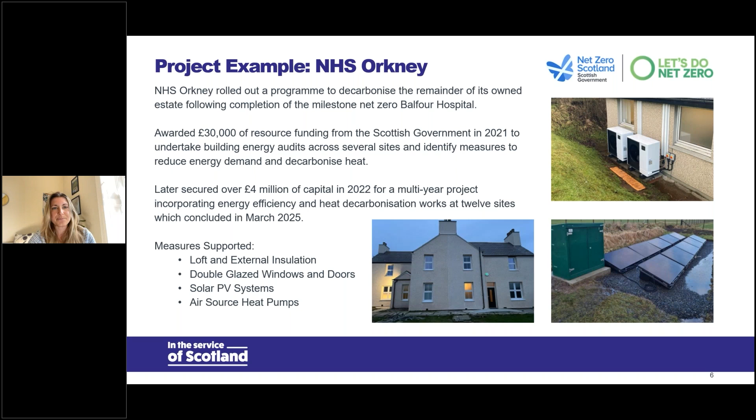The Public Sector Heat Decarbonisation Fund, which is delivered for us by Salix Finance, is the other half of our grant offering. This scheme is for local authorities, universities, and arm's length external organisations, and offers up to 80% capital for a whole building approach to decarbonise heat and improve energy performance.

This has so far supported about 11 projects with £14 million of spend, delivered by Salix, who are an arm's length body of DESNZ. They also deliver all of the UK government's equivalent schemes. That grant fund is open for a little bit longer, closing on Tuesday for our phase 2 of Salix.

I will talk about one of the projects that Salix supported on our behalf last year, which is the Glasgow Life Museum Resource Centre. Sorry, next slide, Emma.

Again, a really exciting project supported by the grant scheme for the Glasgow Museums Resource Centre. It is a storage facility primarily and visitor centre. It houses over 1 million objects from different collections, which I'm led to believe is about 90% of the city's collections stored at the resource centre at any one time.

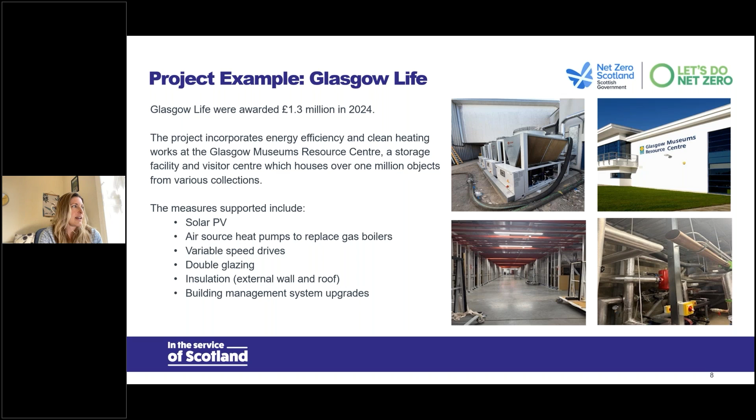Next slide, please. I'll just briefly cover the 2 loan schemes that we run for the public sector - again, these are managed by Salix Finance. The first one is the Energy Efficiency Loan Scheme, which offers up to 75% of the total project value.

The benefit of the loan scheme is, first of all, obviously 0 interest loans, but there is also a bit of flexibility about what you can use loans for in comparison to the grant scheme. For example, LED lighting is eligible under the loans.

Salix offer a kind of holistic support that's wrapped around the loan schemes, with technical support and also peer support and networking opportunities that they help to provide. Both of these loan schemes can be used to fund projects under the non-domestic energy efficiency framework when it's back up and running as well.

We've had a large number of projects supported through the loan schemes, over 1,000 projects, and enormous savings as well from those 1,000 projects, over £200 million over the lifetime. The recycling fund, I think, is a fabulous concept.

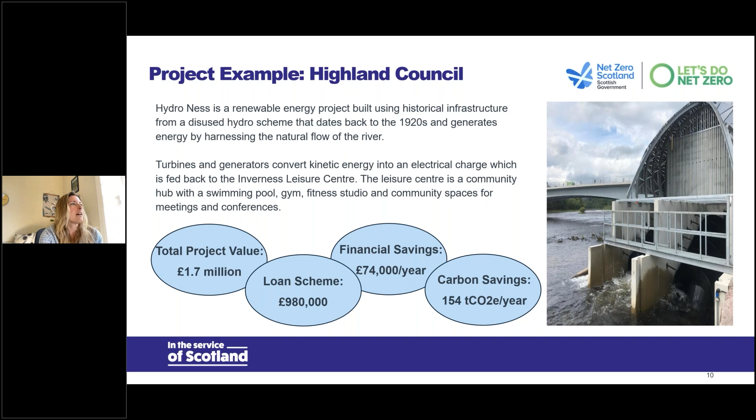I won't pretend to know how the turbines actually work, but it looks really fascinating.

I'm going to talk a little bit about the non-domestic energy efficiency framework and project support unit, mostly to let everybody know these things are coming. So we're currently procuring the project support unit, which will be consultant support, available to all public sector bodies to call off that framework to get consultant support for project planning and identification of measures.

Then, once having used the PSU and hopefully successfully identified a project, and hopefully successfully gained funding, either grant or loan, public bodies can come back onto the NDEE framework, which is actually designed to support the procurement of those projects, and then can ensure that a public body feels confident they're going to get a really good value contract to deliver that work.

As I said, the previous NDEE came to an end last year, so we're just in the process of re-procuring both frameworks, and we'll definitely keep everybody up to date on when they're back in place.

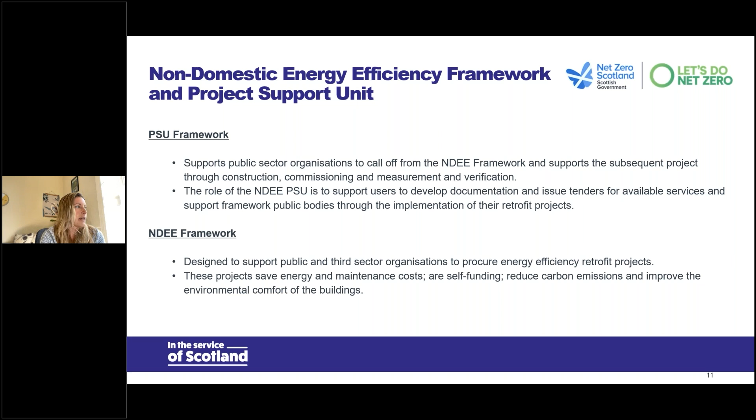I wanted to finish off today just by talking a little bit about another aspect of the work we support more broadly from the public sector unit, which is the Net Zero Public Sector Building Standard. It's something I feel really passionately about, I think it's such a great tool. It's been used really successfully on new build projects across the public sector, and it's something I hope we can apply to more retrofit projects.

The Scottish Futures Trust was the key partner that helped us develop this standard, and they run an excellent series of events on the standard, so I won't even attempt to explain the whole standard, just to encourage those who are interested to reach out to the team at SFT, and again to say I think it's really important that we apply the standard to retrofit projects as well.

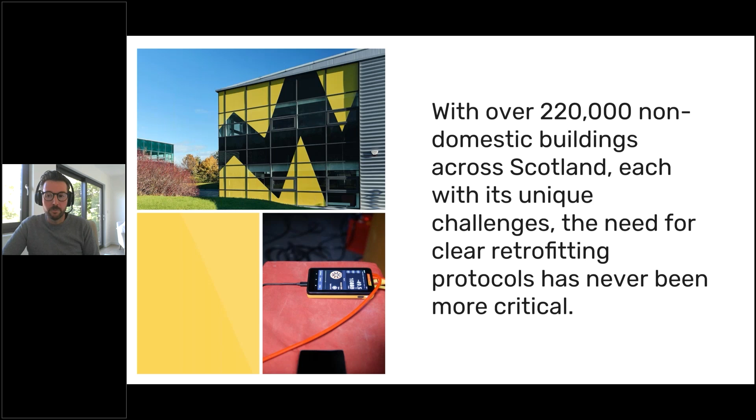So we set out to give Scotland the national centre that it deserves, and we wanted to provide something that acted as a living lab in order to demonstrate different use cases, different approaches.

We don't see this as a building where you would have a carbon copy of this approach, but something more as a menu of options and innovative solutions in retrofit that could be taken away to be delivered on other public buildings or indeed domestic properties as well. The lessons that we learn in retrofit are universal.

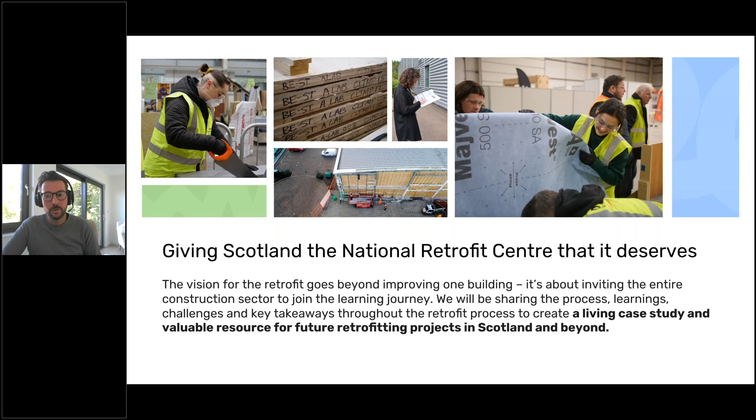We were notified that we were successful in April 2024. However, we were only at stage 1 design at that time, which meant that within the calendar year we had to go to stage 4 design, public procurement, procure the works, get a contractor, get them on site and deliver this project, which made it extremely difficult both in terms of timescales and increased costs experienced throughout the sector.

So there were elements of value engineering which we'll touch on, which I think will be familiar to anyone working in public sector buildings or any retrofit project at all on non-domestic or domestic properties where finance is a real challenge.

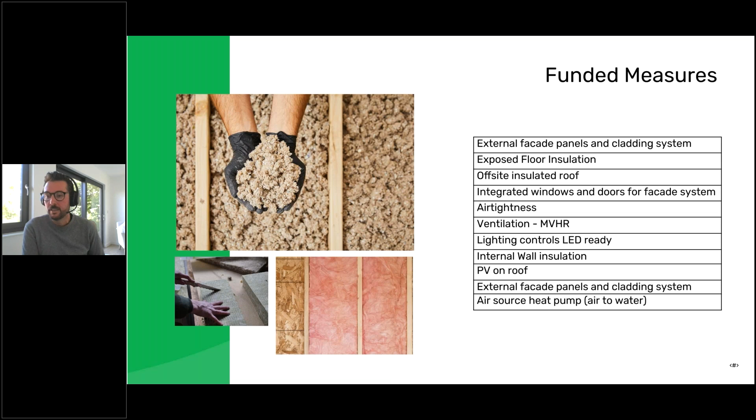So as part of this work, we've split the work into 3 phases. There is a number of reasons for that. We believe that it was more representative of what our stakeholder and wider audience would undertake.

We also had ambitions for the building in terms of future development of that, but that was not set in stone at this point. And we needed to be able to have a deliverable phase 1 project that met the requirements of the funding and also met our requirements as well without creating any abortive spend or work. We didn't want to be installing measures that might later have to be adapted or taken out, but we had to ensure that we were able to deliver something meaningful and reduce the demand on the building.

So the current phase 1 is about heat decarbonisation and fabric envelope measures. Phase 2 is future internal reconfiguration works of the office spaces, as well as potential extension and the completion of that envelope. And the future phases would be phases 3, 4, 5, and 6, which would be the entire building as we see it, eventually ultimately intended to meet the EnerPHit standard, but also the wider net zero campus overall.

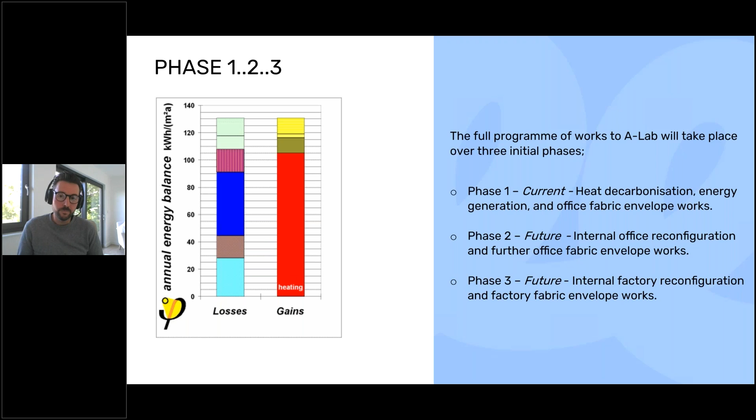At this point, we're essentially taking 3 sides of a 4-sided box down, improving the thermal efficiency on the exterior envelope, increasing the insulation in the roof, and then decarbonising the heat in those heated portions of the front end of the building.

The back end of the building is a non-heated space, factory warehouse space that would come in future phases.

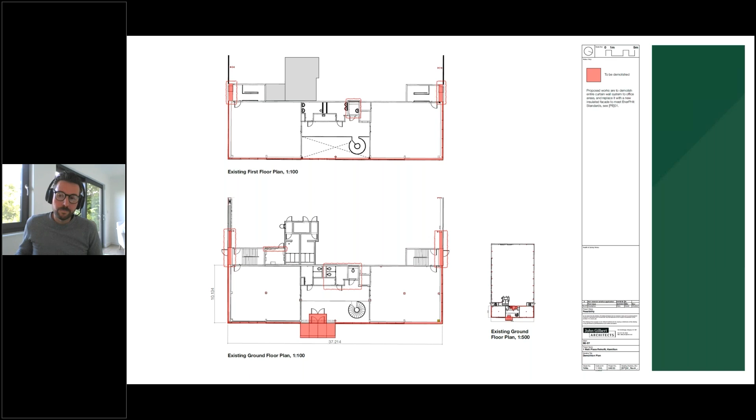Externally, their ambition for this was to reclad the building in a heavily insulated CLT panelised system that we could produce and manufacture off-site as far as is possible, with triple glazed windows and doors, higher energy efficiency, a high degree of air tightness, and using a timber cladding system.

That was our key consideration when going through value engineering options when evaluating the project - to ensure that we met the requirements of the funding and our overall energy ambitions for the project. So anything extra to the thermal envelope was moved into future phases of development work.

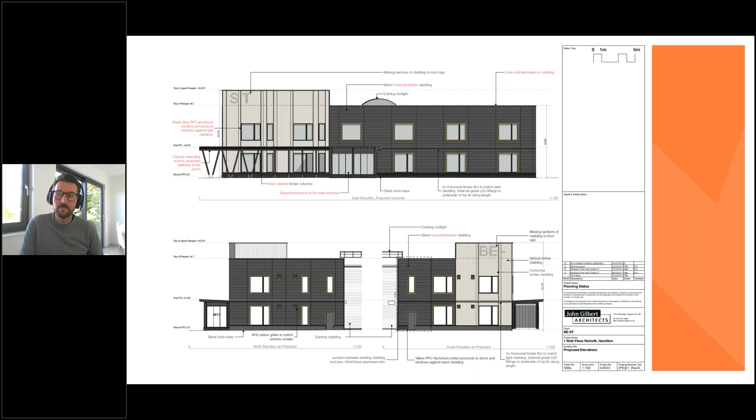So with all retrofit projects, there are challenges and opportunities in decarbonisation. A key factor for us was the timescales to completion, the parameters set by the funding requirements, and also our ability to move quickly and deliver the work.

Opportunity and scoping in terms of the phasing of the development, and also that narrative - how were we able to drive innovation? Being the innovation centre, we wanted to ensure that we were being data driven and also demonstrating as many innovative solutions, product demonstrators as possible, and maximising the showcase for the best of the Scottish construction sector.

How did we manage risk in terms of meeting the funding requirements whilst also not sacrificing our overall ambition, and vice versa? How do we ensure that we capitalise on storytelling, both in terms of our knowledge around embodied carbon and our delivery process, and how do we ensure that we created a platform within the building that delivers more carbon savings beyond those direct savings from the systems installed?

We achieved this by an analysis of the existing building, which included thermography as well as air tightness testing. We developed an overall EnerPHit strategy for the building, which we then phased, so we would not go for certification for that standard at this point, because we would not be completing the full amount of works.

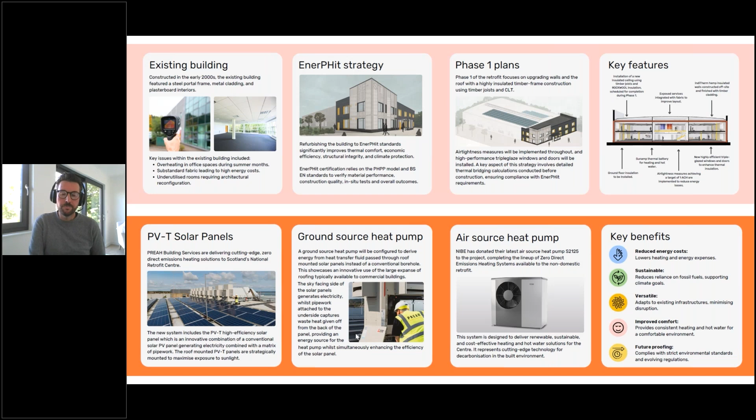Within the building fabric as well, we've managed to partner with companies that we're aware of and who are industry leaders in their field. We've been able to utilise the Kenoteq K-BRIQ, which is a 95% recycled brick, with incredibly low embodied carbon in its production.

We're using Scottish cladding provider Russwood for the external envelope. We've got Ecological Building Systems providing air tightness membranes and tapes to ensure that we can achieve a target air tightness of 1 air change at 50 pascals within the final build.

We've a mixture of Rockwool and IndiTherm, and not highlighted on this slide, we also have Warmcel insulation and blown insulation. What we've done here is utilise the IndiNature IndiTherm hemp and jute batt insulation in the walls, as well as Warmcel blown recycled newspaper insulation within the panelised structure.

The panelised structure has been manufactured within the BE-ST factory using homegrown Scottish timber to create CLT panels by Ecosystems Technologies, and High Six Design have been the architectural technologists who have adapted John Gilbert Architects' system in order to clad the building.

Rockwool insulation is used within the suspended timber ceiling detail because it offers higher performance in terms of fire rating, as well as we wanted to compare and contrast the workability of different materials and show the range of options available.

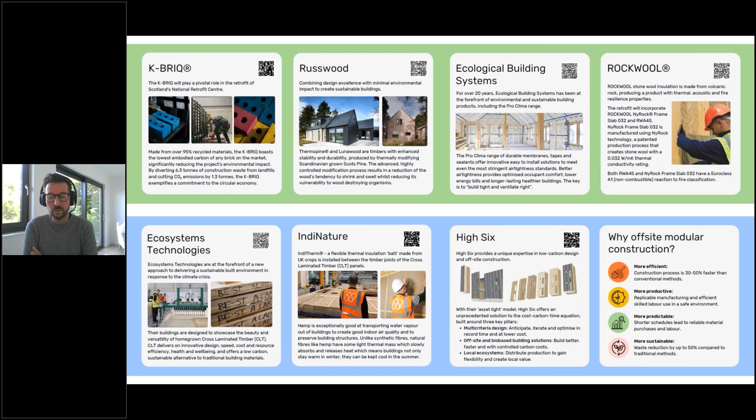This is within our factory at BE-ST, which everyone is welcome to come and visit, as well as coming to visit the project itself, where we were manufacturing the CLT with the design team and members of our own team, to show how easy it is to do, as well as cutting down on the embodied carbon of the response.

Once the CLT has been created, we were able to process it within the factory, strapping it out using timber JJI joists to minimise thermal bridging through the design, and then infilling those panels with the IndiTherm insulation, avoiding any gaps and adhering to Passive House principles. We've also gathered all the evidence for future certification to EnerPHit standard, and had that reviewed by a certifier.

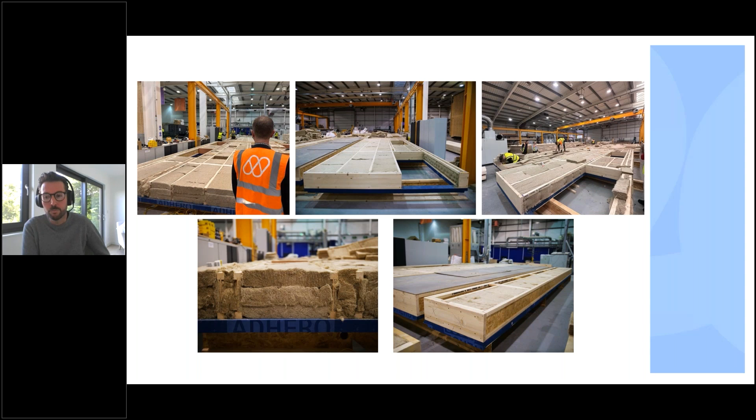The design works on the principle of encapsulating the existing steelwork frame, which is all retained, helping with our embodied carbon calculations, and retaining the existing concrete slab, avoiding any thermal bridging through the structure of the building by enclosing it all within a new system. So we've removed an existing glass and metal curtain walling system and installed this new CLT panelised system.

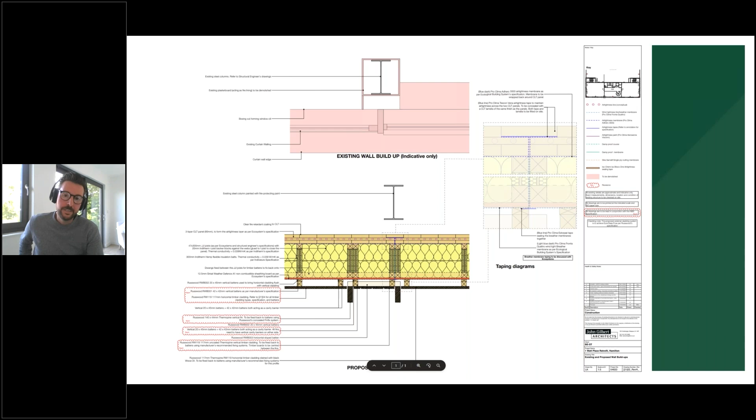These are the panels almost ready to be craned out of position. A majority of the panels come out of the factory 95% complete - fully clad with the windows fitted, tapes and membranes all complete, ready to be craned into position. Other panels were clad in situ, but most panels came out between 85 and 95% complete, which allowed us to meet extremely tight timescales, as well as showing the efficiencies and additional safety we see with modern methods of construction.

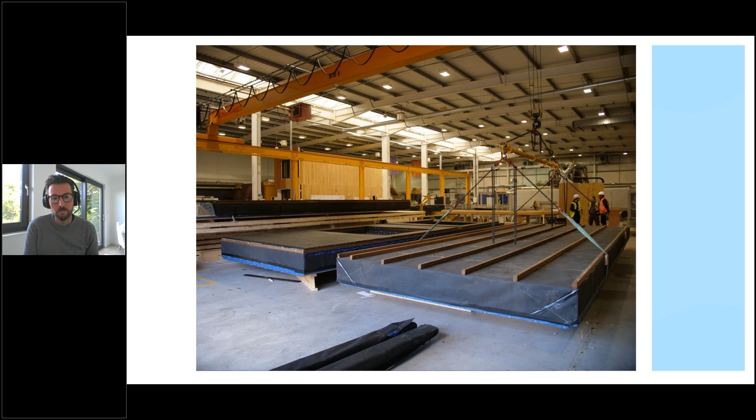We've moved the panels into position here. Emma, if you just want to cycle through these images fairly quickly.

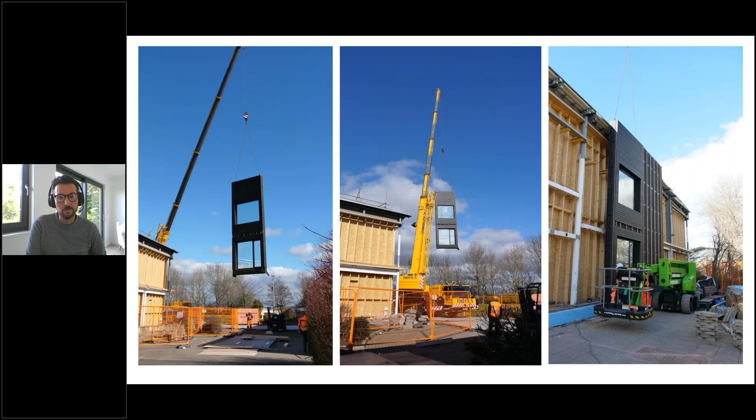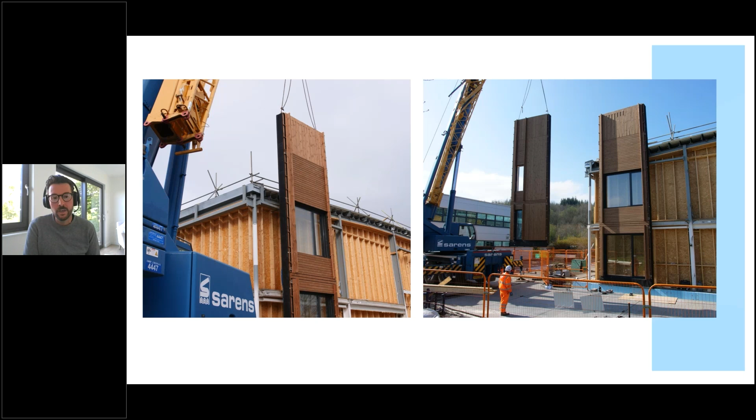So then we crane the panels into position. You can see in these images where we've got the existing structure exposed, having dropped the existing cladding curtain walling system. We've got temporary hoarding separating the external and internal environment, which allows us to work in both areas simultaneously, and also helped us meet that really tight program. The crane lift was done over 5 crane lift days, while manufacturing of other panel phases was completed, and we worked our way around the building installing the cladding system as we went.

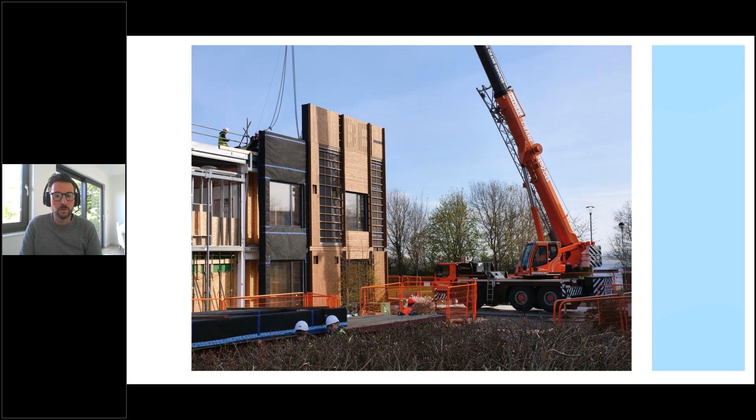We can see here the exposure, the variety between the cladding, how finished one product is over another. Again, the big advantage here too was being able to work simultaneously internally and externally, because there's obviously quite a significant MEP package.

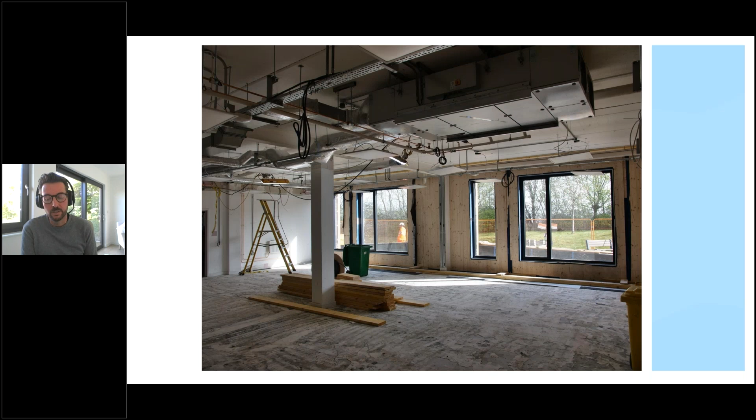One element we did omit in changing our scope within the phase 1 project was ground floor insulation, but we've designed the building to account for future phases of work where ground floor insulation up to 230 mil can be installed. All of the windows and door heads have been designed to accommodate that, allowing us to make savings on additional cost.

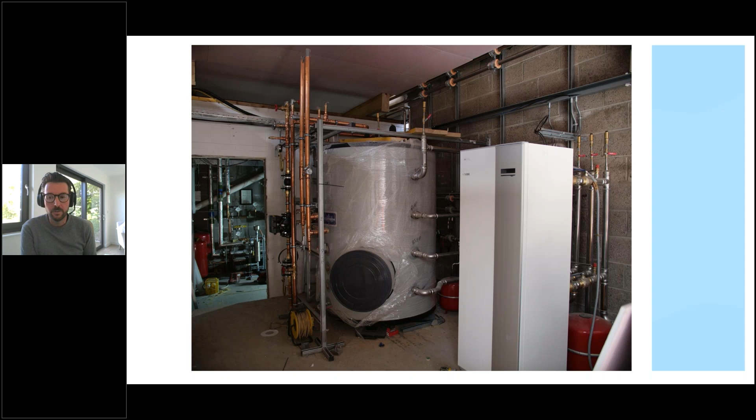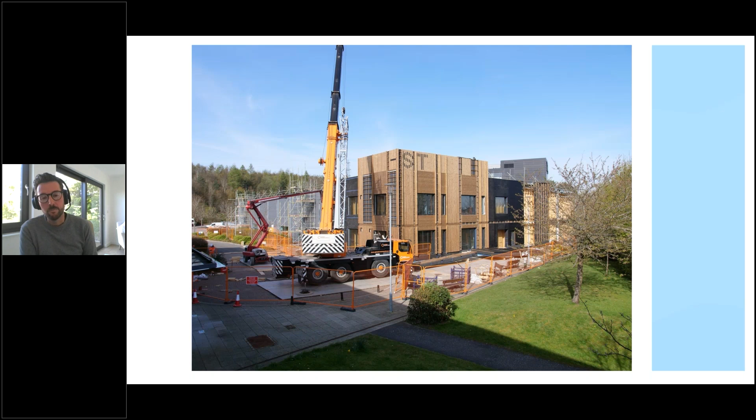We are now fully complete with our external cladding in place, and all internal hoarding has been dropped and all the MEP is installed inside, and we're aiming for completion towards the end of June. The buildings there are available for tours. We're doing a series of behind the build events, and if anyone wants to ask any questions at the end, happy to answer, or you can contact me and drop me an email.

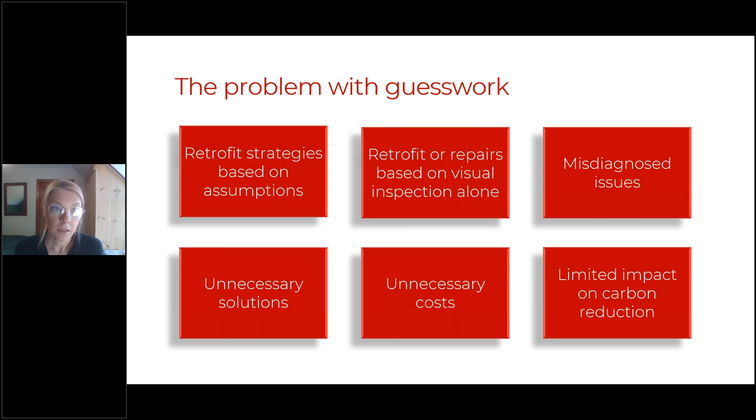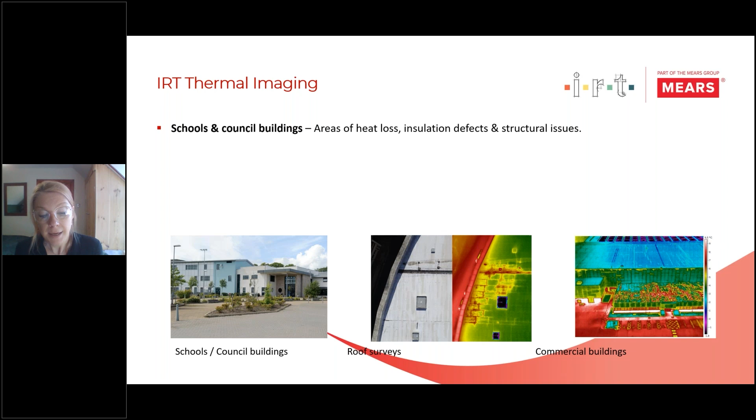Thermal imaging plays a big part in removing that guesswork, and it provides clear visual evidence of where buildings are losing heat. This can be through missing or damaged insulation, thermal bridging, cladding failures, or water ingress, and it can help decision makers just see what the eye cannot.

So we carry out heat loss surveys mainly within the winter months. We start around October time, and we carry them through right to about the end of March. We tend to do a lot more in Scotland, maybe up to the end of April, just because the temperatures are a lot colder. So we do have quite a short time frame in those winter months to really do the thermal imaging side of those projects.

And I've highlighted 4 key areas here where we carry out the majority of our survey work for non-domestic buildings. The top one there is schools and council buildings, and these surveys tend to be to assess the areas of heat loss, any insulation defects, and any structural issues.

We do loads of flat roof surveys, again, mainly on schools, but they're quite reactive surveys. We do find that the buildings have issues currently, and we're out there just to really locate leaks and address wet insulation and just where those areas are. And it offers a nice non-intrusive solution for roofing companies too.

Commercial buildings has mainly been to assess condition of cladding, the condition of render, and the insulation performance on those buildings. The post-retrofit is probably more prominent in the last year to 2 years, and the post-retrofit surveys we carry out has mainly been to validate the workmanship of any measures that have been applied to commercial buildings, and really just to ensure that those solutions are working. So that will be a heat loss survey across elevations and roofs, just to check that those solutions are working.

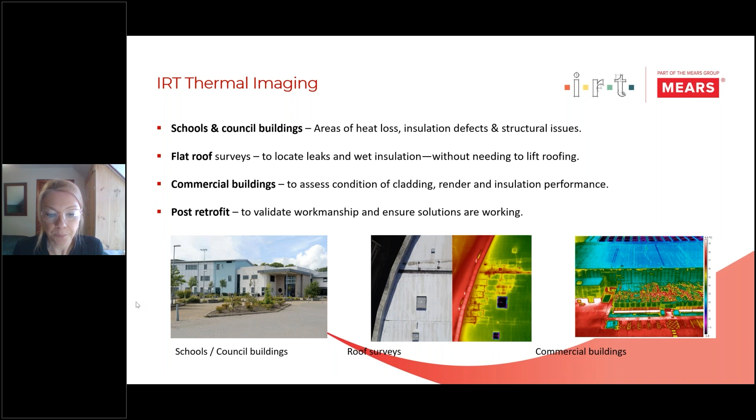So here's an example of a recent survey that we did on a school. It's Portree High School in the Scottish Highlands. We carried out this survey on behalf of Mears Facilities Management. They manage 10 schools on behalf of the council.

Despite years of repairs, the school continued to suffer from water ingress and a fair amount of fabric deterioration. Traditional investigations couldn't really pinpoint the main cause of the fabric issues. The background on this project is many ongoing issues with decay and deterioration of the building fabric, which was leading to render damage, guttering issues, and a lot of water ingress.

There was a lot of investigation work being carried out, reports being carried out, and constant remedial works. Various reports had been commissioned, but all coming back with suspected issues, and a lot of those suspected issues were that the problems were with the guttering and the downpipes. So the Mears team were still quite unclear what the main cause was, and really what action to take here.

So what did we do? We were commissioned to do a full visual and thermal survey of this building, covering all of the elevations and the roof. The visual images are taken during the daytime, and they highlight any staining of the building fabric, cracked render, issues with guttering, and presence of vegetation. The nighttime thermal imaging is to detect areas of heat loss, thermal bridging, as well as any presence of moisture.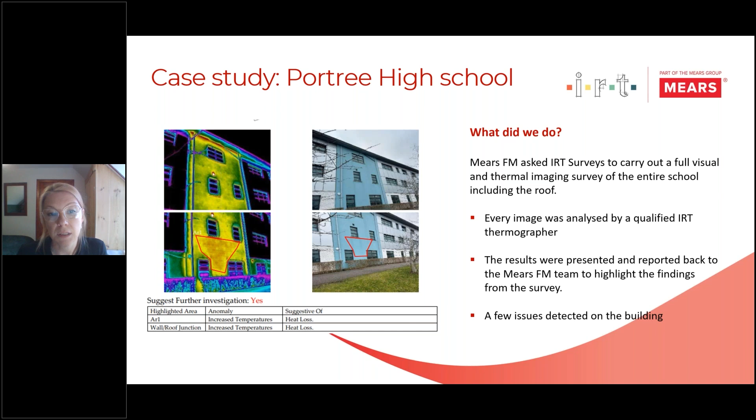The images on the left here are an extract from the report, highlighting areas where they've seen some defects in the building. All of these images are then analysed by the IRT team based in Dundee, and the results are reported back to the client. In this case, it was back to the Mears FM team, highlighting the findings.

We sit down with every client during this process and go through this report in a fair amount of detail. I think in the past we've maybe expected a lot of our clients to interpret the information themselves and understand what their next action might be. Our analysts have really provided a great service in providing a lot more detail around what those images are actually telling the client and what the issues are with that building.

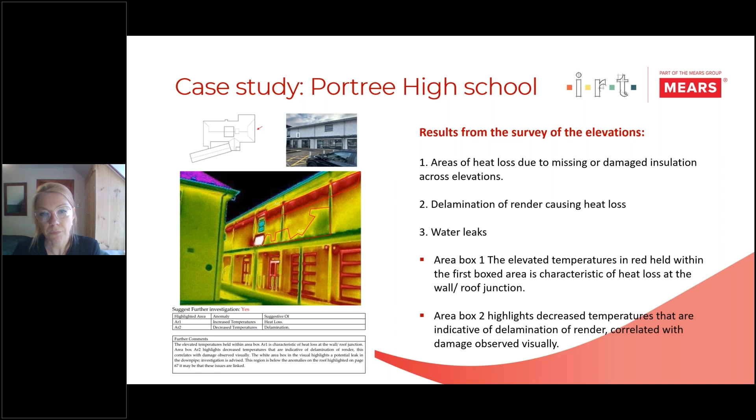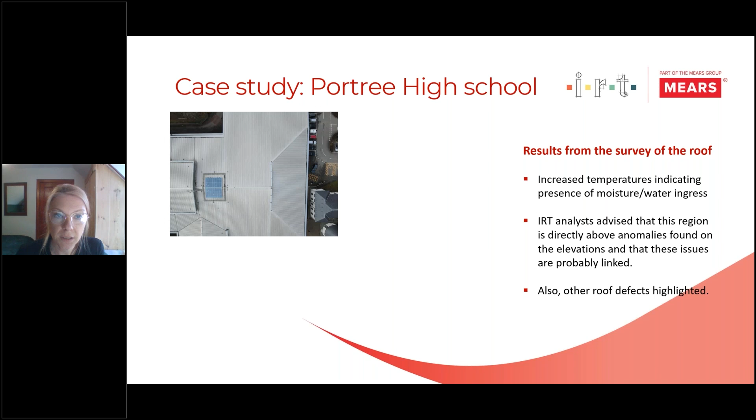The results from the survey revealed multiple critical issues in this building. The main one was heat loss at wall and roof junctions from missing insulation, a fair amount of render delamination, and gutter detailing failures as well, but a lot of hidden water ingress not detectable by visual inspections.

There are some images here on the slides that might be quite interesting, but the extracts show the roof survey that we carried out, and the overall conclusion from our analysts was that most of the issues were caused by the roof, not by the guttering and downpipes, which there were issues with. So these insights did enable Mears to justify that full roof replacement, which was funded based on the thermal evidence here.

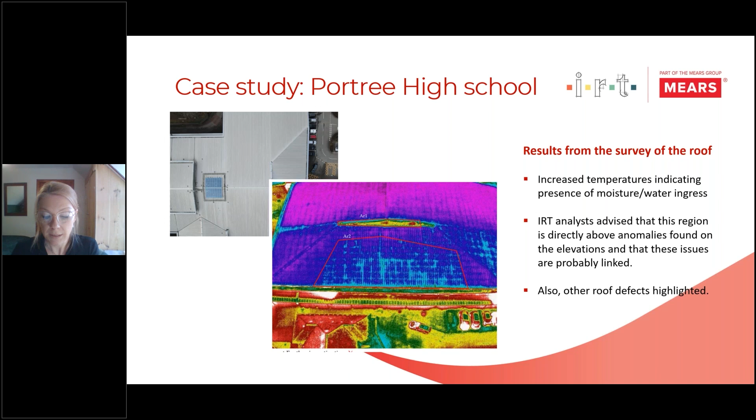So, impact and ROI - what was the outcome? The thermal survey provided enough proof that the building fabric issues in the school were being caused by the roof. With the thermal data, Mears were comparing 18 months of reactive maintenance costs to the cost of a new roof, which results in a more cost-effective, energy-efficient, future-proof solution to increase the life cycle of that school.

By comparing those additional data sets, it just helps with that decision-making process. There's a nice quote there from the life cycle manager at Mears, saying they wouldn't have been in a strong position to get those repairs approved without being certain that was the particular issue with this building.

So, to close off and summarise: thermal surveys don't just detect problems, they help to guide decarbonisation, by understanding the true condition of your building as a starting point. This in turn ensures that any investment you make in retrofit is targeting the real inefficiencies and not assumptions. Thermal imaging is a powerful tool for assessing energy efficiency, but combining it with other data sets can provide a more comprehensive approach.

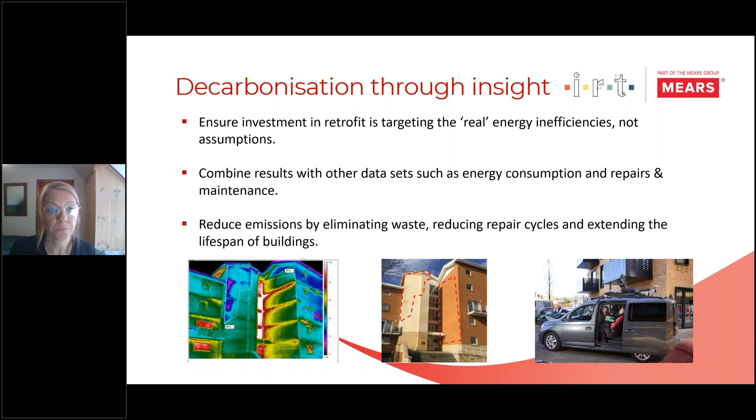Thank you, Emma. Next slide. So I think the next slide just has my contact details on it, but if anyone wants to discuss a current project, we can compare results from other similar projects we've carried out, or go through the process of what we do and the outcome. My contact details are there today, and you can contact one of our team and set up a meeting with us anytime. Thank you. Over to Amy.

Hi everyone, thanks Lisa, and thanks for having me today, Emma. My name is Amy Ritchie and I am Head of Sustainable Resources and Social Responsibility at the University of Strathclyde. I work within the university's Sustainable Strathclyde team, based within the Estates Department. Our role is to keep the university on track in terms of our net zero and sustainability goals, and work with colleagues within estates and more widely in the university, and also externally, to develop and deliver our net zero pathway for decarbonisation of the university, which is a big challenge for us.

For me personally, I come from a sustainability and heat network and low carbon heat policy and strategy background. So hopefully I can give you an overview of where we are as an institution, some of the issues the other speakers have spoken about in practice, and some of the challenges and opportunities for us in terms of decarbonisation.

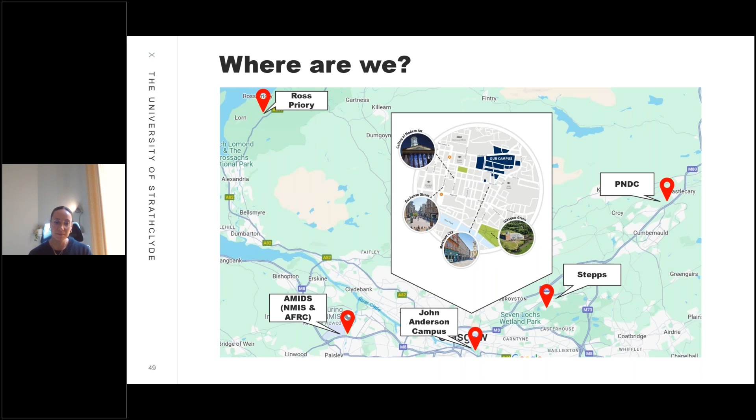Next slide, please, Emma. Just to set our work in context, the university has several ambitions around sustainability and net zero. We published our brand new Strathclyde 2030 strategy last year, which takes the university from 2025 to 2030. The headline net zero target is an 80% reduction target for greenhouse gas emissions against our 2018-19 baseline for scopes 1, 2 and some scope 3 - we're currently looking at our scope 3 boundary to make sure we have a clear picture of what we're aiming to reduce - and of course net zero by 2040 at the latest.

It's also important to mention we have two other high-level targets around sustainability in our education and research. We want all education programmes to have learning outcomes on sustainable development by 2027, and to make sure we measure the impact of our research and that it aligns to the sustainable development goals. Whilst our team looks after the greenhouse gas inventory for the university and ways of reducing that, there is very much overlap with our other goals and activities. Primarily we exist to deliver education, and we take responsibility for the students and staff who go out into the world after Strathclyde and the impact they make. So there are definite opportunities to learn and share with our academic colleagues as well.

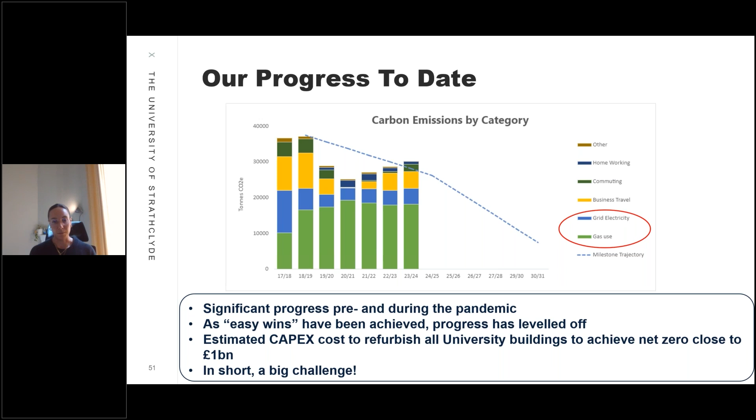To go into some of those challenges, which I think some of the other speakers have illustrated, the city centre campus—and I'm talking mostly about our John Anderson campus in this context—presents challenges in terms of the limitations we have with just digging up roads and similar interventions. We've got people constantly passing through our campus, and we're quite limited in terms of space. That presents challenges in terms of how often we can shut down buildings, planning permission, and things like that to actually undertake interventions on our buildings.

And then in terms of the actual campus utilisation, since COVID the way the campus has been used has just changed. People's expectations of work and studying have changed in terms of how often people are on campus and the way in which they want to use buildings, and that has an impact on how we heat, power, and decarbonise.

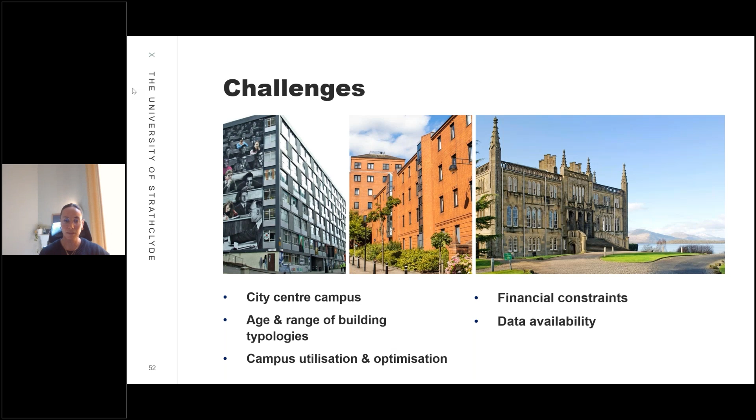But then on the flip side, there are lots of opportunities as well. City centre campus was on the last slide as a challenge, but it's also an opportunity. We are really well placed as the John Anderson campus is within the Glasgow City Innovation District, so we have so much talent and expertise in that area that we can tap into.

We work very closely in partnership with organisations and collaboration groups like Sustainable Glasgow, which brings together other educational establishments in the city centre, but also private sector partners and public sector partners in terms of the council and Scottish Government. We really try our best to tap into those groups and make sure we're working collaboratively.

It also means we don't have to work in isolation, particularly on our city centre campus, where the Glasgow City Council are doing a lot of work delivering their local heat and energy efficiency strategy. We have a heat network on our campus, so we've been in talks for a long time with the City Council about developing district large-scale heat networks and how we can play a role in providing an anchor load for those networks, hopefully pushing those schemes forward.

We also have academic expertise, including our Net Zero Accelerator Group, a collective of academics working on things like decarbonisation and building standards. We want to get their expertise and build it into our operational projects. We also have student projects taking place, which are often excellent quality.

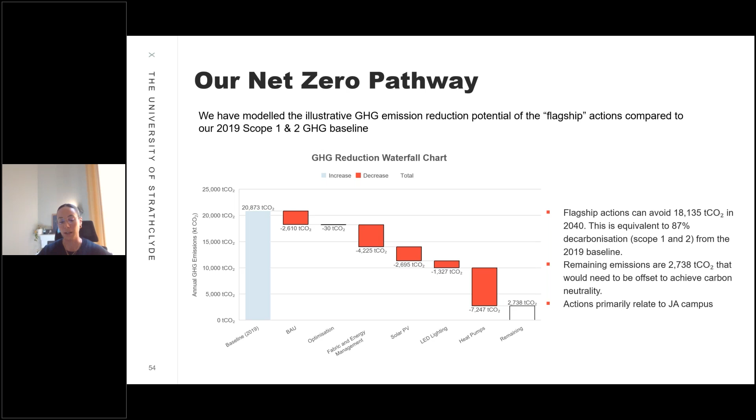What we want to do is build on this work to split it up by building typologies and create a pathway that shows the places and timelines where we should make the best decisions in terms of well-timed, well-costed interventions on campus, and present that to our senior management with funding options as well.

In terms of actions we've taken, we, and I think most of the higher education sector, are trying not to build new buildings. We don't need any new buildings, but if we are going to build new, we need to build better. The National Manufacturing Institute for Scotland is an excellent example of this, and I'm very happy to share more information with anyone interested - we do tours out there and it's a really excellent facility.

I was out there this week and they were talking about how well some of the sustainable interventions work. We used the RIBA Sustainable Outcomes Framework to design and deliver the NMIS building. It's net zero for regulated energy, and we incorporated several interventions and innovations to make sure we reduce both the operational carbon and the embodied carbon - the actual materials used to build.

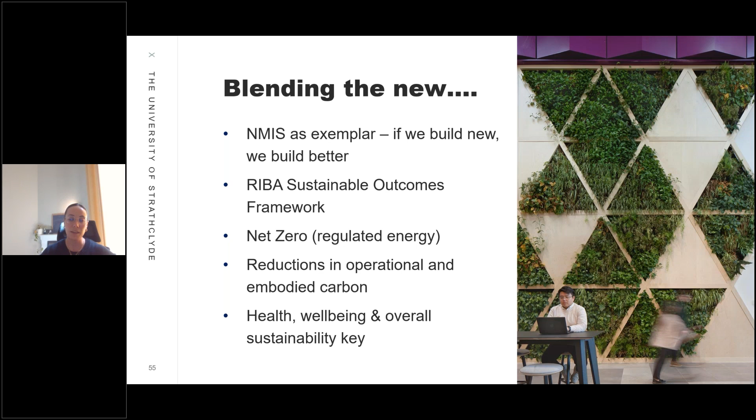With all of our projects, this is key to mention: we don't want to just focus on carbon reductions, we also want to make sure we're delivering health and well-being benefits - well-connected buildings that people can walk and cycle to. We want our campus to be a healthy, safe, nice place to be for all of our staff, students and visitors. The next slide shows some of these interventions in more detail.

So there's 500 kilowatts of installed PV capacity on the roof, but almost a megawatt of installed capacity in total. There's also some ground mount. We've got rainwater harvesting, which a colleague was telling me meets around 80% of their water needs. We've got enhanced fabric and air tightness, overcladding, and screening on the windows to reduce solar glare, making sure the temperature regulation in the building is much better, so it's not boiling hot in summer and freezing cold in winter.

This is an interesting facility in that the part on the right hand side is all a big factory space, which is all open plan, and there's a lot of air circulation in there as well. The building is also fed by a 5th generation heat network that was a partnership with Renfrewshire Council and funded by LCITP funding. We're connected to that and have some booster heat pumps in the building. Very happy to share more information on that.

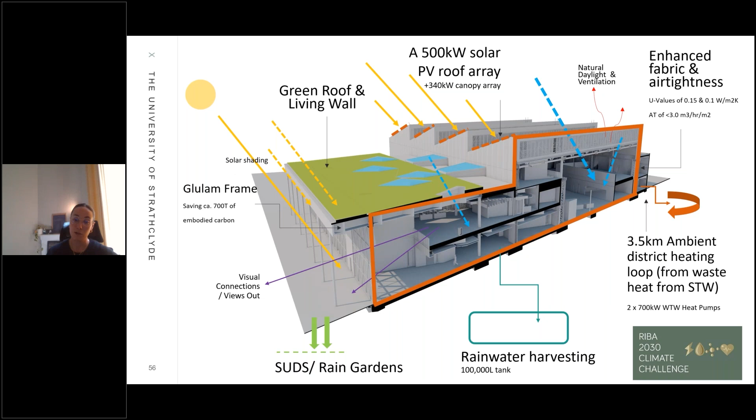In terms of retrofits and actions on our current buildings, we're very much taking a fabric first approach. We want to reduce energy usage on our campus first and foremost, to then enable further heat decarbonisation, particularly in terms of connecting to low carbon heat in the city centre and eventually working towards decarbonisation of our CHP energy centre. Our CHP engine has about 10 years still left on its lifetime, so we're building that into our decision making in terms of when enabling works need to be completed.

And then looking at different investment options. We've taken advantage of some of the funding measures that Kat mentioned, particularly the Salix Recycling Fund, and also received funding from the Scottish Funding Council.

And then I mentioned the point about climate adaptation, health and well-being, and involving our community as much as we can in the decision making. These buildings are for our students and for our community, so we want to make sure they serve the purpose, both in terms of their energy efficiency and sustainability credentials, but also whether they serve the need of our community.

We also have a big retrofit project currently underway in terms of planning. Our old Students' Union building, on John Street, we are looking to embed the public sector net zero building standards, so that's the first time we will be using that standard. Kat touched on that as well, so I'm excited for that to come forward. There are some interesting examples in terms of the use of that building and inviting in the community, and things like rainwater attenuation, and potentially even looking at internal vertical farming in that building. Lots of really exciting stuff going on there.

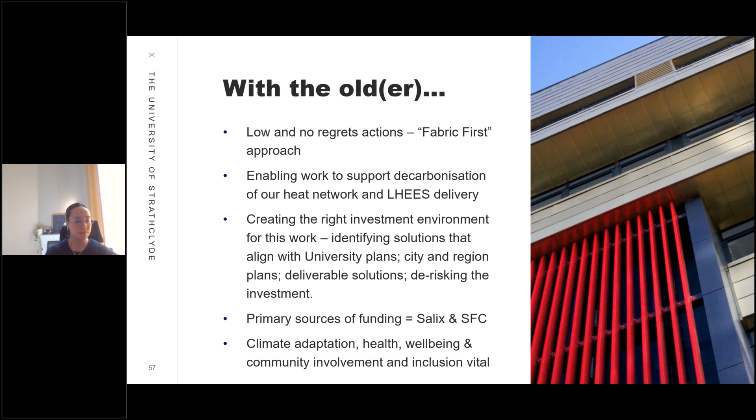Next slide please. These are just a couple of final examples of both ongoing and completed projects. We're currently undertaking an overcladding project of our John Anderson building, which is our physics building. That's a £12.5 million project, but with projected savings annually.

Same with our rooftop PV, so we have rooftop PV on several buildings on our John Anderson campus at the moment, but continuing to roll that out to generate more of our own electricity. Also last year we just completed the extension of our district energy network to our residence building, achieving further savings in terms of cost and carbon, but also increasing the overall efficiency of the network, which was sized to serve much more buildings than it currently does. So thinking about how we connect up on a city scale, and how we work with partners like the NHS, the hospital just up the road from us, and Glasgow City College just up there, building in those elements as well.

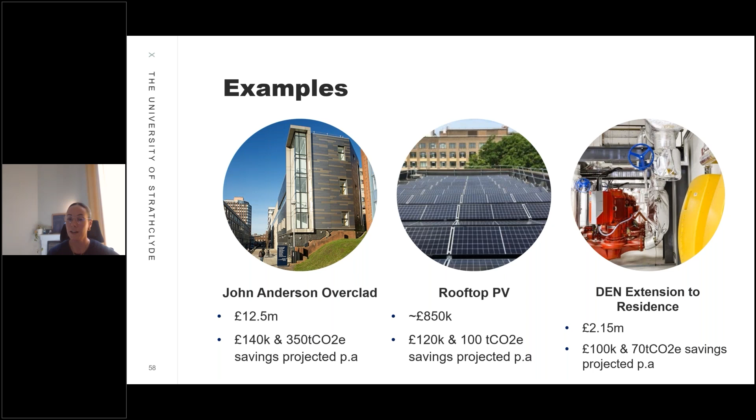And I think that is it from me. But if anyone would like to follow up, or if there are any particular technical questions, please do get in touch. I believe Emma will be sharing our personal emails as well. So thank you very much.